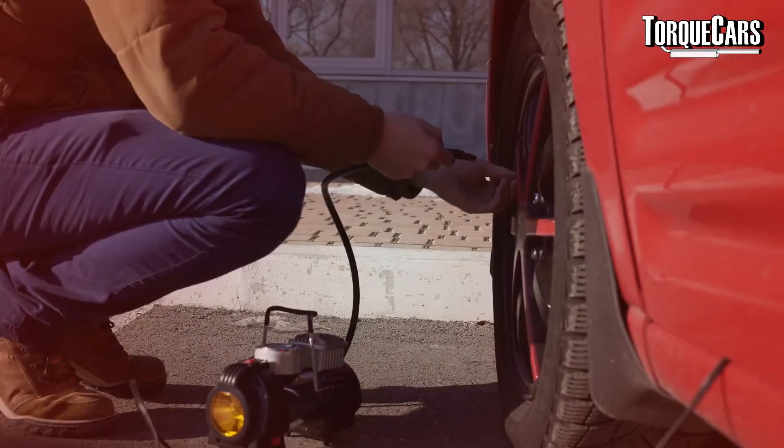And also if you're buying a car, it can sometimes give an indication as to whether someone has fitted worn tyres to the car, and if they have, you've got to question all the other maintenance that's carried on. And we'll be specifically looking at tyre pressures and why people add nitrogen to their tyres and whether this is a good idea. So maintaining your tyre pressure is very important.

You'll always find inside a car there's a little panel somewhere that will show you the typical tyres that the manufacturer recommends. It's usually 2 or 3 different rim sizes. In my case it's 17-inch or 18-inch rims. There's also a choice of tread widths and tyre profiles. So you just look down the chart until you find yours, and there's different conditions.

So a fully loaded car will need higher pressures, or if you're doing a lot of motorway driving you need to increase those pressures a little, and it'll recommend typically a different pressure for the front and the rear of the car. So pay close attention to this and make sure that your car is always within those PSIs. Bear in mind that those markings indicate cold pressures. When a tyre warms up, the pressure will increase.

So most people will go to a garage to check their tyre pressures, and unless it's a short journey your tyre has started to warm up. So it's possible to get your tyre pressure spot on at the garage, and then when you come home and measure it you'll notice that it's a few PSI out.

We've also heard from people who fill their tyres with nitrogen. Now nitrogen molecules are larger than oxygen molecules, so you don't get the same seepage or loss of pressure over time. But we don't really think it's worth going to that. Standard air that you pump into your tyre is 78% nitrogen anyway and about 20% oxygen.

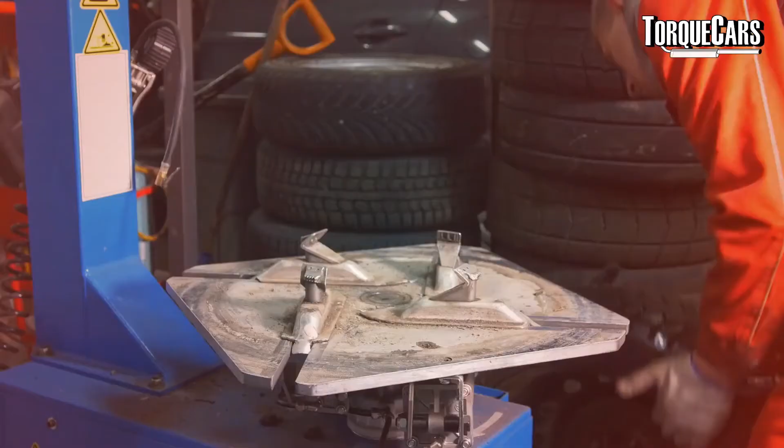It's really annoying if you get a puncture and have to replace all of your tyres, or at least both tyres on one axle. First of all, we're going to look at the numbers on the side of the tyre, because these are typically the most important thing when you go to buy a tyre. You want it to fit your car.

Someone came up with the idea of keeping everyone happy when defining these measurements on the side of the tyre: the first large number is in millimetres, the second smaller number is a percentage, and then you've got inches. The larger number in millimetres is the cross section across the tyre. The slightly smaller number is a percentage of that width, showing the height, depth, or profile of the tyre. The final number in inches matches the rim size, so you clearly need a tyre that fits your rim. You can't fit smaller or bigger tyres to a standard rim.

Changing the size of the wheel will affect the gearing. If your wheel is smaller, it will reduce your top speed but increase your acceleration, and if your wheel is larger, the opposite happens. To get round that effect, most people go for a larger alloy wheel with a lower profile tyre, and the perception is that those low profile tyres give much better grip and traction.

The other problem you've got is curbs. If you've only got a small amount of rubber, most of your alloy wheel is going to be in line with the curbs, and you're going to get a lot of scratches. It's one of my big pet hates, having cars with dents on the alloy wheels - they just look terrible over time.

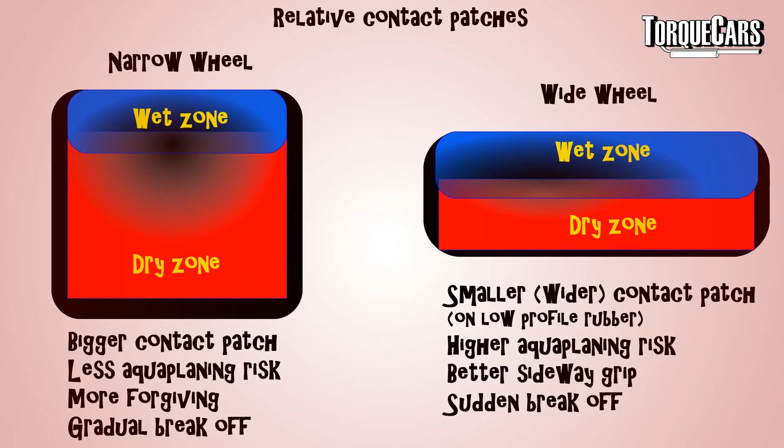There's also a perception that wider wheels always give you better grip, but actually, if you were under a tyre on a piece of glass, you'd see the contact patch is very tiny in relation to the overall wheel size. On a narrow wheel you've got a fairly square contact patch, and on a wider wheel it tends to be slightly shorter and slightly wider, so you're not actually gaining very much contact patch. Also, a wider wheel will trap more water and more snow, making it more prone to aquaplaning than a thinner wheel, which surprises a lot of people.

It's one of those things where if you look at something on paper, it seems to make sense, but then when you put it on your car and take it out into the real world, you hit on all these problems and issues that just didn't come up in theory. Sadly, a lot of people have wasted a lot of money buying a wheel that's inappropriate for their car.

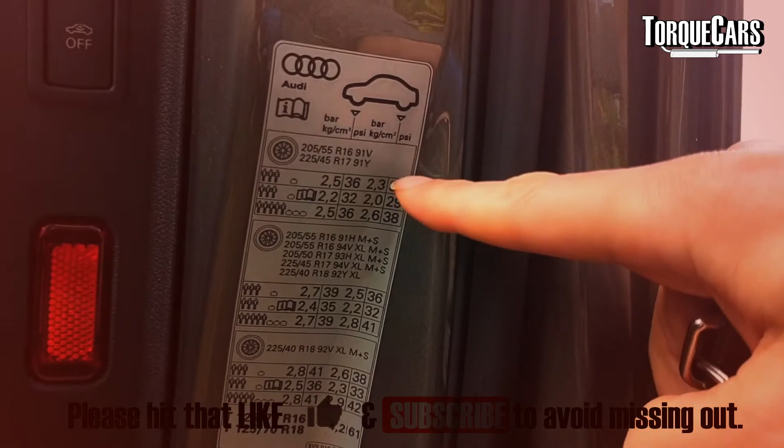Although there's a little bit of wiggle room when it comes to the width of the tyre and the profile, so we've got a little bit to play with there, generally the manufacturers will specify an optimum selection of tyre. Another important marking on the side of the tyre is the load rating - they used to show how many plies there were in the tyre and the construction.

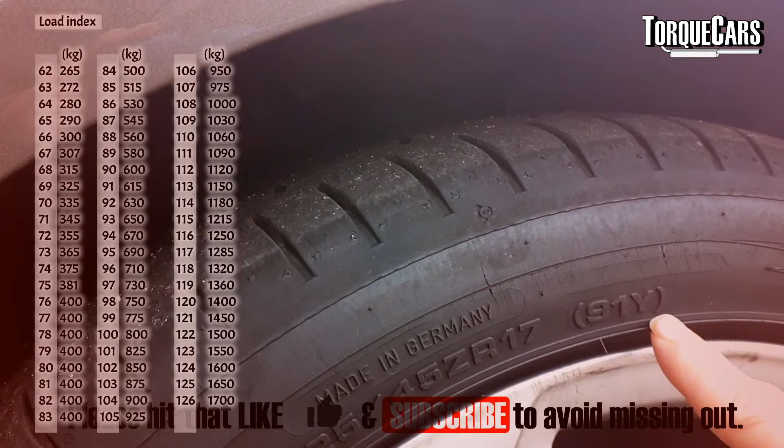You often still get an R to indicate it's a radial construction. You'd never mix radial and the older cross-ply tyres, but thankfully most tyres nowadays are radial and consistent. The load rating shows the amount of weight that tyre can carry, depending on how it's constructed and how many layers of reinforcement are inside it.

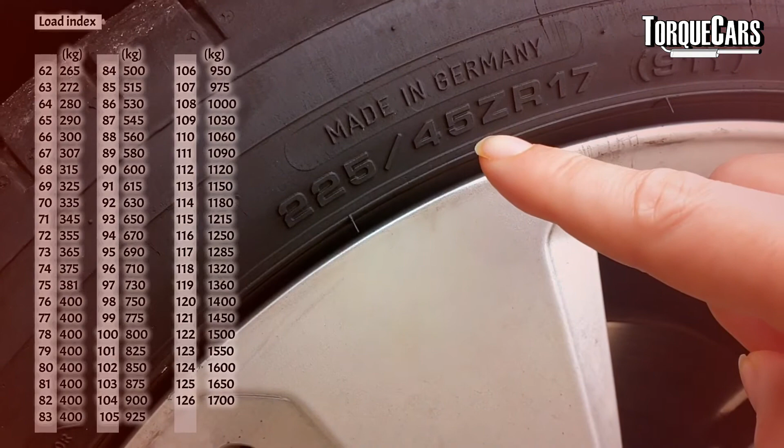If you've got a car capable of 150 miles an hour, you're putting a certain amount of stress from the engine's torque into the tyre every time you accelerate, brake, or corner. The speed rating takes into account those loads, and it's a tested maximum speed, so the tyre will usually perform beyond that level. But with lots of high speed or track day driving, the temperature in the tyre builds up a lot, which can significantly affect the tyre's structure and stability. So it's important to have the appropriate speed rating for your car, and if you've tuned your car and upped the power, it makes sense to go to a slightly higher speed rating to cope with those extra stresses and strains.

The load rating is per tyre, so if you've got a car with four tyres, which is fairly average, you multiply it by four to get the overall load rating or maximum weight of the car. A 66 load index is 300 kilograms per tyre, or a car up to 1,200 kilograms. A 108 load index is 1,000 kilograms per tyre, or a car that can weigh up to 4,000 kilograms.

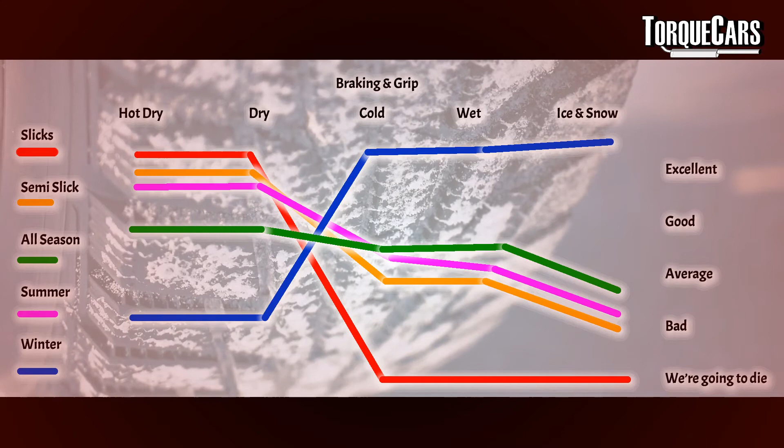Summer tyres typically have a 20% shorter stopping distance in summer when the roads are dry, but the downside is they don't perform anywhere near as well in the wet, so your stopping distance could end up being 20% worse in those conditions.

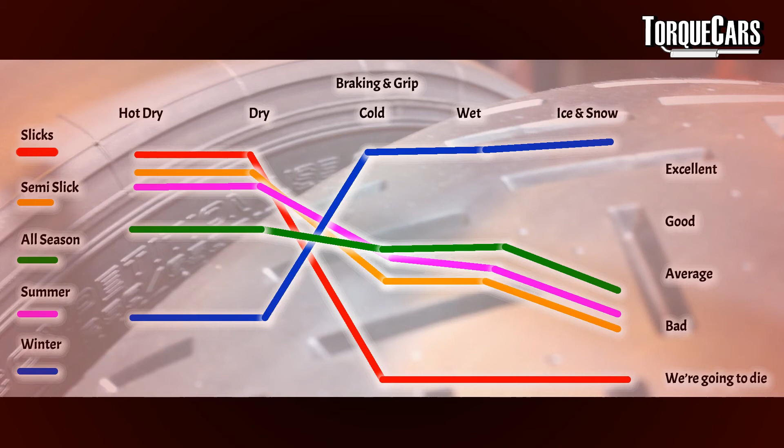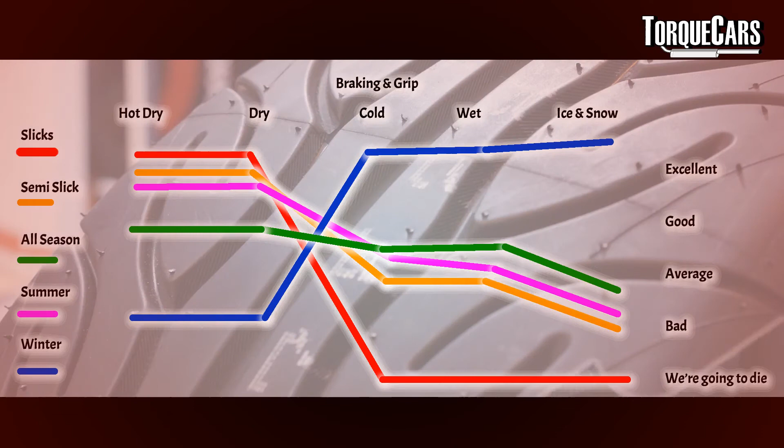A winter tyre is exactly the opposite. In winter your stopping distances will be 20% better, but as the weather warms up and the road is dry, those winter tyres perform much worse and can add 20% to your braking distance.

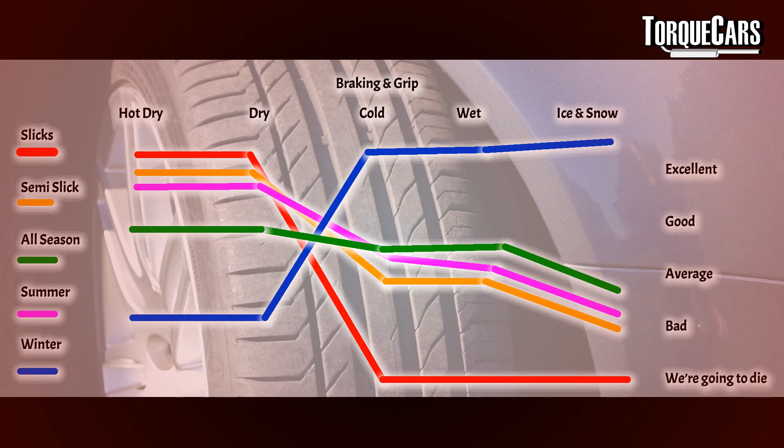So are all-season tyres good in both seasons? Well, they're not brilliant in both, they're a compromise. Rather than lose 20% of your grip in winter or 20% in summer, they're set up to give an average amount of grip all year round.

In a country like ours, the UK, we get a lot of rain and cold weather, but not extremely cold weather. It would certainly make sense to go for an all-season tyre.

In other areas, there might be a much bigger demarcation between summer temperatures and dry weather conditions versus winter wet weather with lots of snow, ice, and extremely low temperatures. In those instances, it really does pay to have two sets of tyres, one biased towards summer use and one biased towards winter use.

Now you might be saying that's going to cost extra money, but actually you're doubling the life of your tyres. You're not burning up your winter tyres in summer, since they're a softer compound that wears more quickly, and with two sets of tyres, that's twice the lifespan overall.

It's obviously going to depend a lot on how important performance is to you in each of those seasons and how much driving you do.

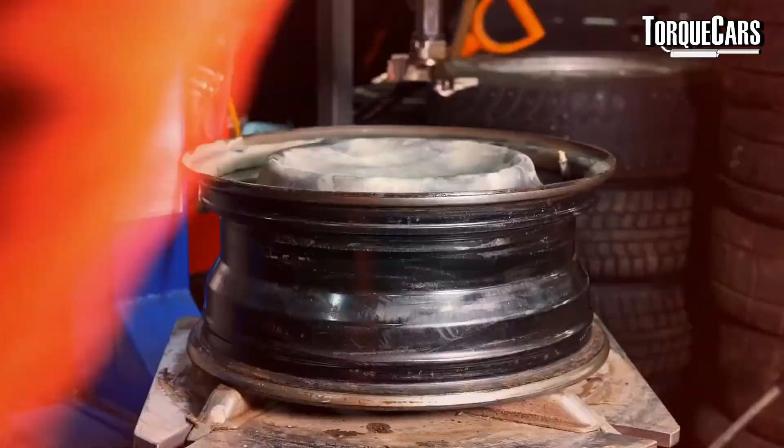We've seen people get an extra set of alloy wheels so they can just unbolt the wheel and put the new wheel on with the new tyre as the season changes, which makes a lot more sense than taking the car somewhere to have the tyres swapped. The other issue is obviously storage of those wheels, but it really is worth it.

Until you've actually used a winter snow tyre in the snow, you do not realise just how good they are. They significantly improve traction and braking and can be a real lifesaver.

When you're buying a tyre, most countries have some sort of rating system that shows the wet grip, the fuel efficiency, the rolling resistance, and the noise of the tyre. A low fuel consumption tyre can actually save about 6% of your fuel because it's got lower rolling resistance. But often lower rolling resistance means slightly less grip, slightly less performance. So there's always a compromise when it comes to choosing a tyre.

Also, as the tyre wears, the characteristics can substantially change. For example, a car tyre that's quite near the legal minimum is brilliant in dry weather in the summer. They use slick tyres on race cars for a reason, because you've got the maximum tread contact patch with the ground. But as soon as you get water in there, that water isn't dispelled and the car will aquaplane much more easily. We've seen some people get new tyres for a track day and actually shave off some of the tread to get the optimum tread depth for maximum grip.

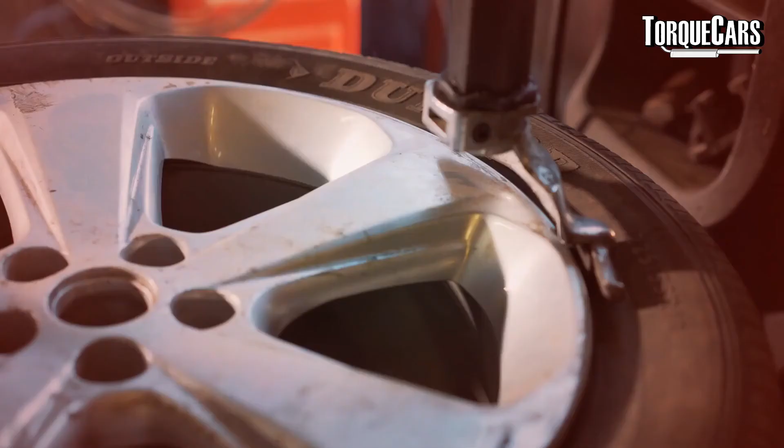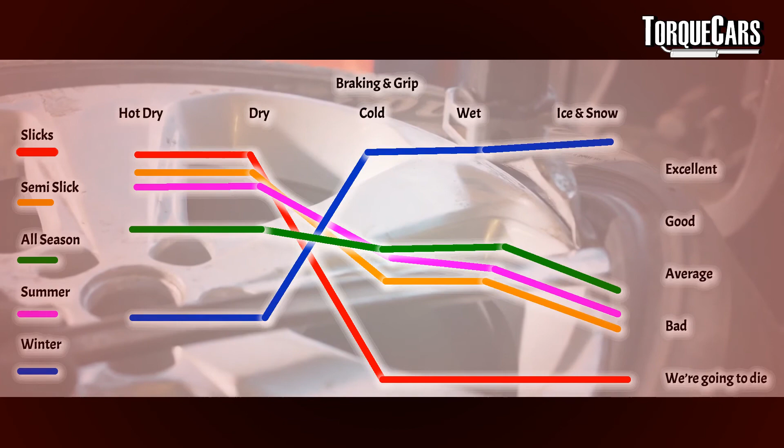We just wanted to cover your choice of tyres and some of the common things to look out for, and the fact that all-season tyres are not necessarily good in all seasons. They're just not terrible in off seasons where you've got extremes of temperature.

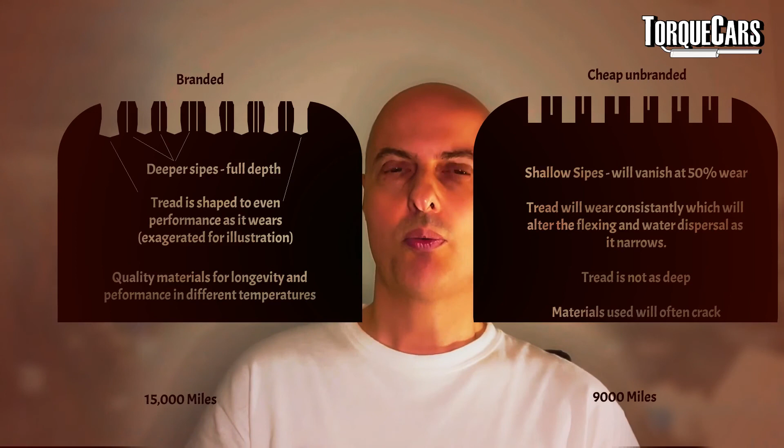There's a big difference between branded tyres and cheap tyres. Often they'll perform similarly straight out of the box, but as they start to wear, they'll usually wear more quickly. I've had some branded tyres that have lasted me 15,000 miles, and some cheaper unbranded tyres that I've worn out in 9,000 miles. It wasn't 50% of the difference in cost that I benefited, so in the long run I'm going to be paying a lot more on budget tyres. And those budget tyres, as they wore down, the grip dramatically reduced, whereas the branded tyres are designed to maintain their performance as the tread wears.

Instead of just cutting straight blocks into the tread pattern, it will be tapered so you get the same sort of performance as the tyre starts to wear. And for best performance, don't mix tread patterns across the axles. Try and keep the tyres the same on the fronts and rears.

Look out for very cheap tyres. We wouldn't recommend you buy part-worn tyres. They often come from breakers yards where cars have been involved in accidents, so they might have heavy braking wear and flat spots on them, or they may not have been correctly maintained, or may have been subject to repairs in the past. If you don't really know the history of the tyre, you need to be really careful. And remoulds are where they strip off the tread and mould new tread onto the tyres. They're often cheaper, but we've heard a lot of people complaining about the longevity, reliability, and tread patterns. It's often all done on the cheap.

If it was me and my car and my family's safety, I would really want to invest in a good set of premium tyres. So we really hope this video has been useful to you. It's given you a little insight into the world of tyres, and when you go and buy your next set of tyres, you're going to be informed and able to make an informed decision.